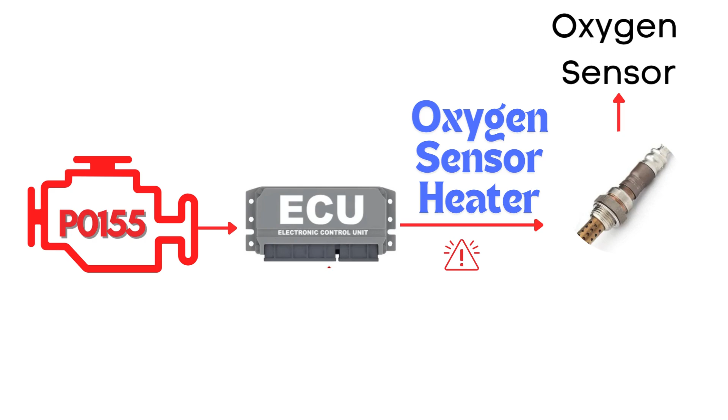Let's break down what the P0155 code actually is. This code gets triggered when the engine control module detects a fault in the heater circuit of the oxygen sensor, specifically the oxygen sensor heater circuit for Bank 2, Sensor 1.

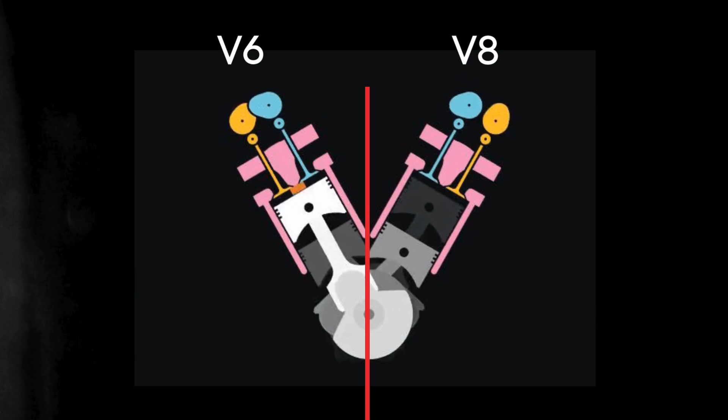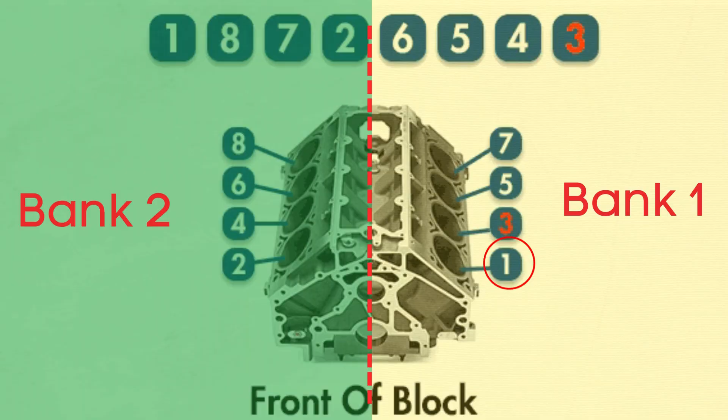Now let's learn what Bank 2, Sensor 1 means. In engines with multiple cylinder banks, like V6 or V8 engines, you'll have two sides or banks of cylinders. Bank 1 typically refers to the side of the engine where cylinder 1 is located, and Bank 2 is on the opposite side. Each bank has its own exhaust line, and each exhaust line is equipped with a catalytic converter.

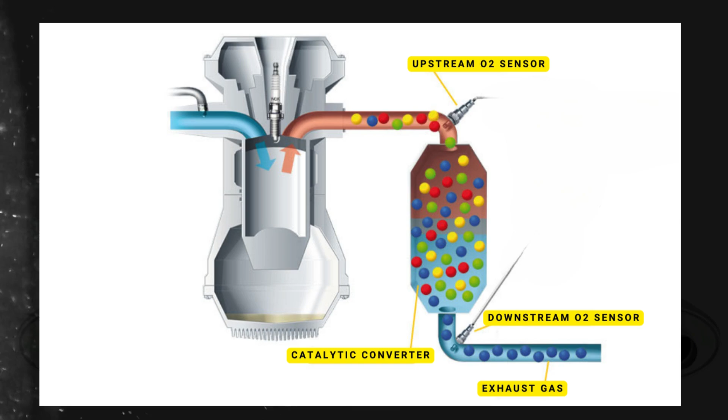Now here's where the oxygen sensors come in. Each catalytic converter has two oxygen sensors: an upstream sensor, which we call Sensor 1, and a downstream sensor, known as Sensor 2. So when we talk about Bank 2 Sensor 1, we're focusing on the oxygen sensor that's upstream on the opposite side of the engine from where cylinder 1 is located.

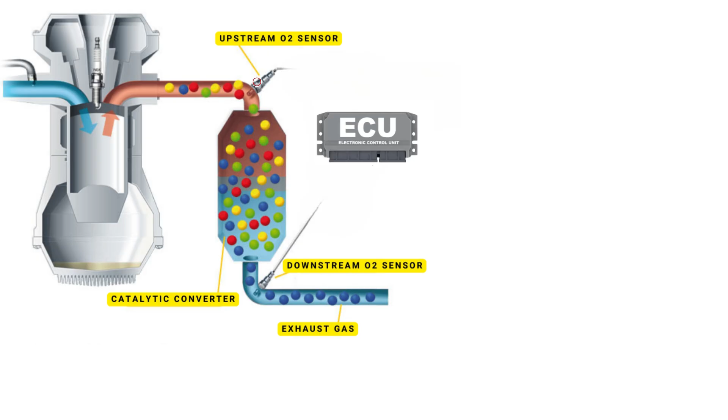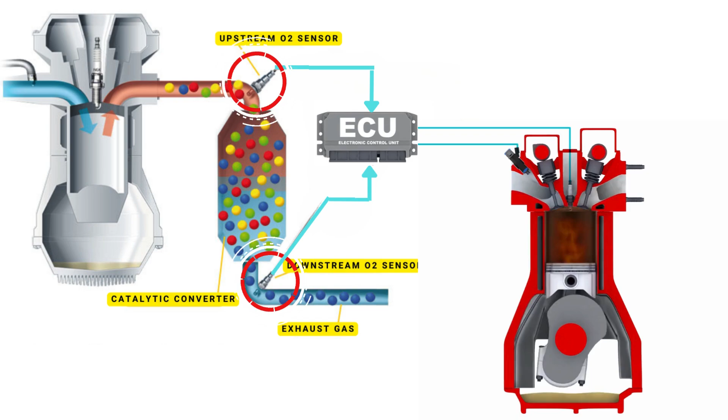Now let's learn why P0155 was triggered. Your vehicle's oxygen sensor plays a vital role in monitoring the oxygen content in the exhaust gases. It sends this data to the ECU, which then uses it to maintain the optimal air-fuel ratio by adjusting the timing of the engine's valves, allowing just the right amount of air and fuel to enter the combustion chamber.

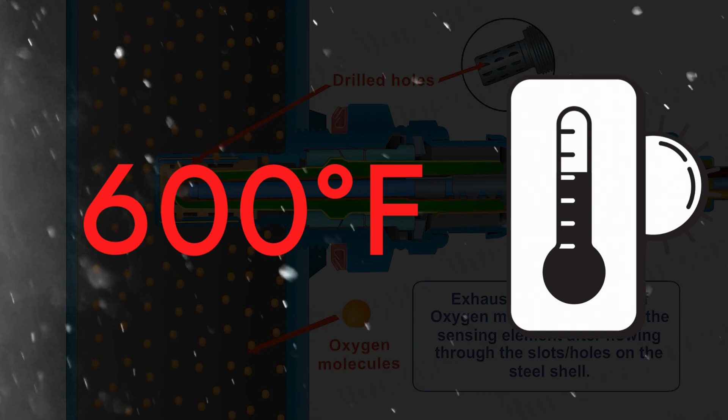But here's the thing: an oxygen sensor won't function correctly until it's heated to a certain temperature, around 600 degrees Fahrenheit for conventional sensors. That's where the heater circuit comes in. It's designed to warm up the sensor quickly, so it starts working sooner.

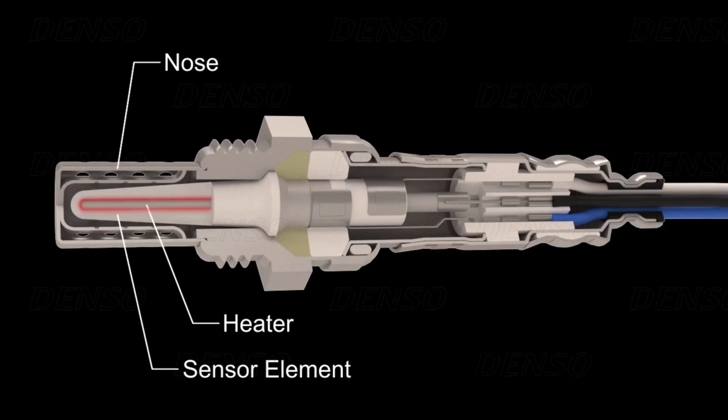The ECU regularly checks this heater circuit to make sure it's functioning properly. If the ECU detects a problem with the heater circuit in the oxygen sensor on Bank 2 Sensor 1, it triggers the P0155 code. Now that we know what P0155 means, let's find out how to fix it.

Troubleshooting P0155 involves several steps, and we'll discuss each one in detail.

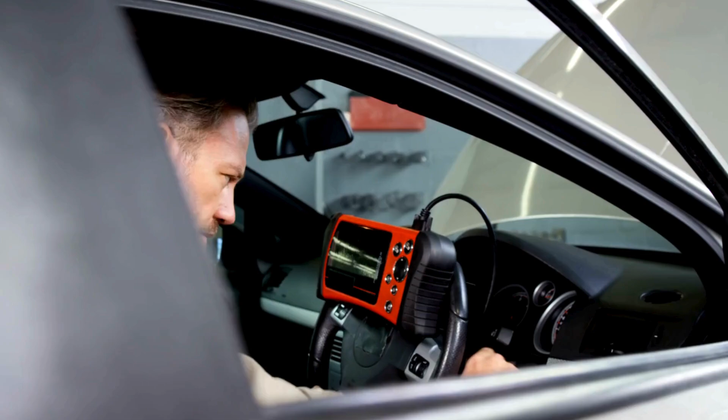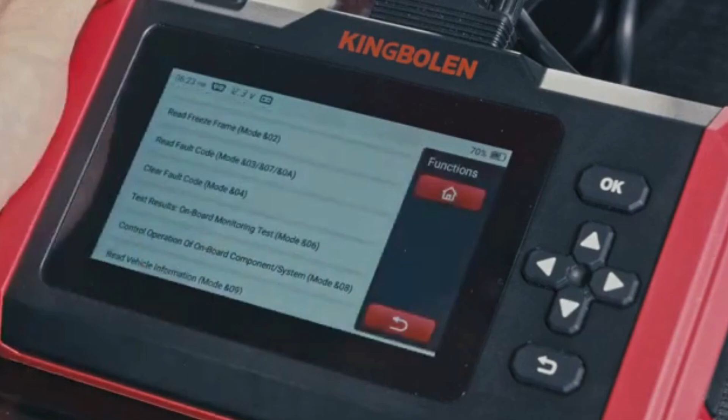Let's get started. Before diving into specific repairs, perform an OBD2 scanner reset to clear the codes. Sometimes these codes pop up due to recent maintenance work and can resolve themselves after a reset. To reset the error codes, use an OBD2 scanner.

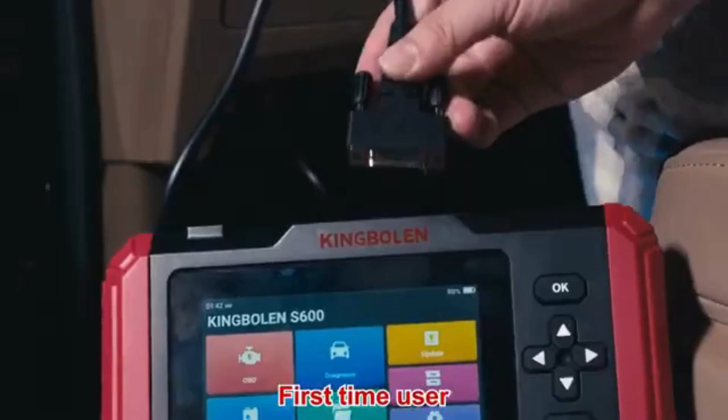Simply connect the scanner to your vehicle, follow the instructions to clear the trouble codes, and see if the P0155 code reappears. If the code comes back, it means there's a persistent issue that needs further troubleshooting.

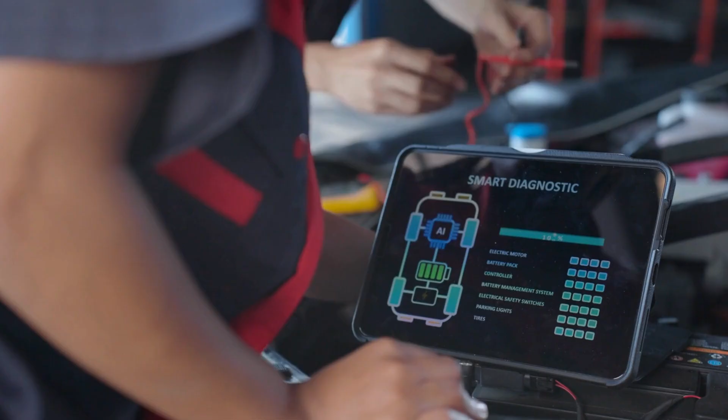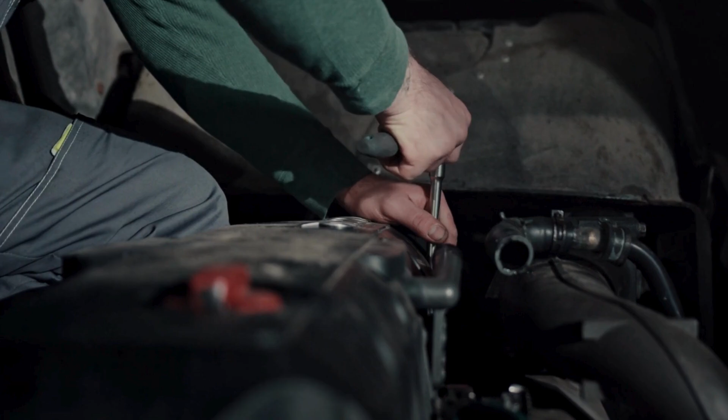Step 1: Start by visually inspecting the heated oxygen sensor. Carefully examine the sensor itself, along with the wiring and connectors. Look for any signs of physical damage, such as cracks, frayed wires, or loose connections. If the HO2 sensor appears to be damaged, it's best to replace it.

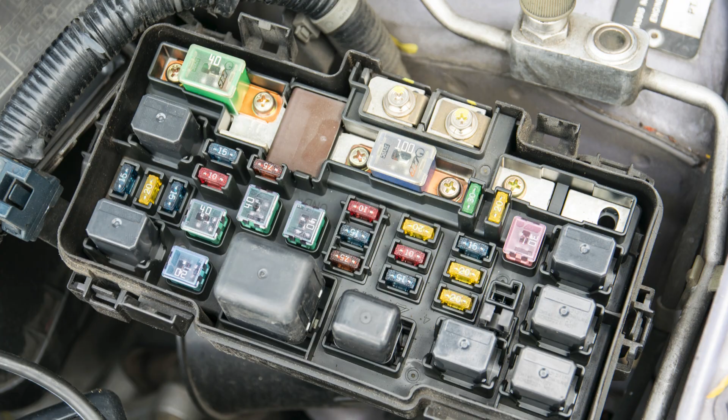Step 2: Check for a blown fuse and broken wires. First, locate your car's fuse box. You'll need to find the specific fuse that controls the oxygen sensor heater circuit. To do that, check the diagram on the back of the fuse box cover. It'll tell you which fuse is the one you're looking for.

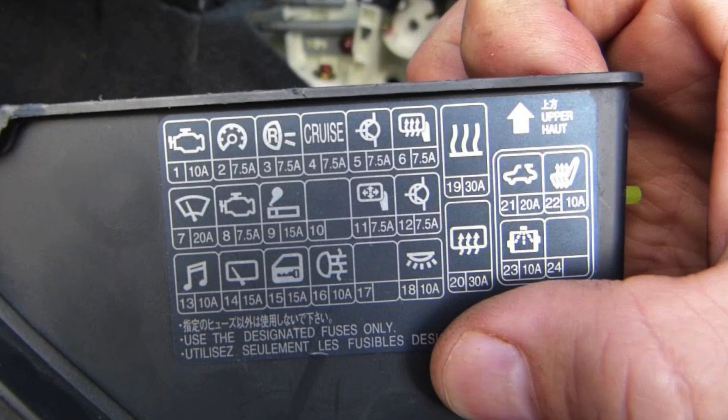Once you've found the fuse, inspect it closely. If the fuse link is broken, it'll need to be replaced. Next, check the wiring around the oxygen sensor. Look for any broken or frayed wires. If you spot any damage, repair the wires and recheck to see if the P0155 code is cleared.

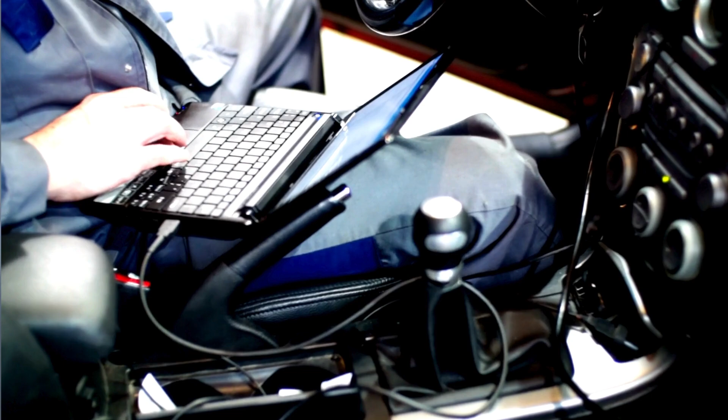If the fuse and wiring are in good condition, but the P0155 code persists, let's move on to the next step. Step 3: Test the oxygen sensor heater.

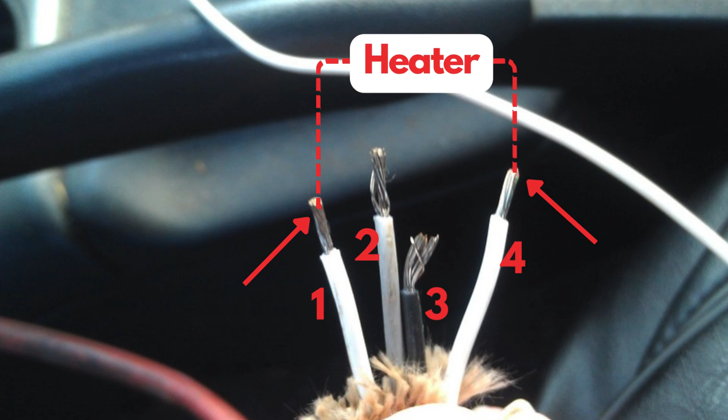Oxygen sensors typically have 4 wires. 2 of these wires, usually of the same color, are dedicated to the heater circuit within the sensor. Over time, the heater circuit can burn out and stop functioning properly.

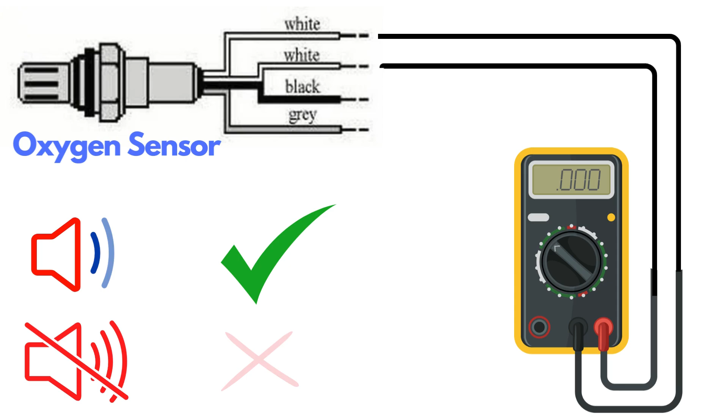To test the heater circuit, you'll need a multimeter. Set the multimeter to check for continuity, then place the probes on the 2 heater wires. If the circuit has continuity, the multimeter will beep, indicating that the heater is functioning. If there's no beep, it means the heater circuit is broken and you'll need to replace the oxygen sensor.